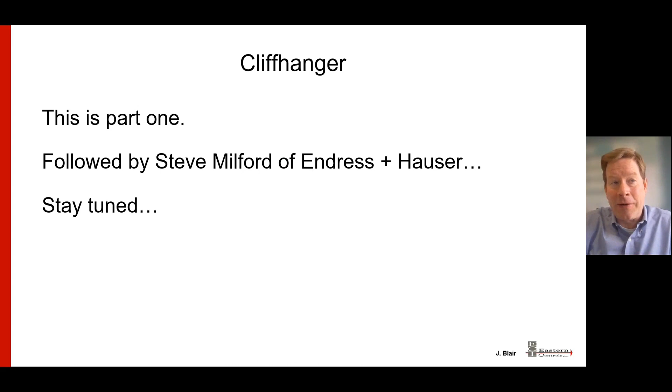So thank you for being here today. If you're a child of the 70s or 80s, maybe you remember the TV show where what's going to happen to Larry Hagman on Dallas. This is part one, a cliffhanger. I'll be followed by Steve Milford of Endress and Hauser in a later presentation.

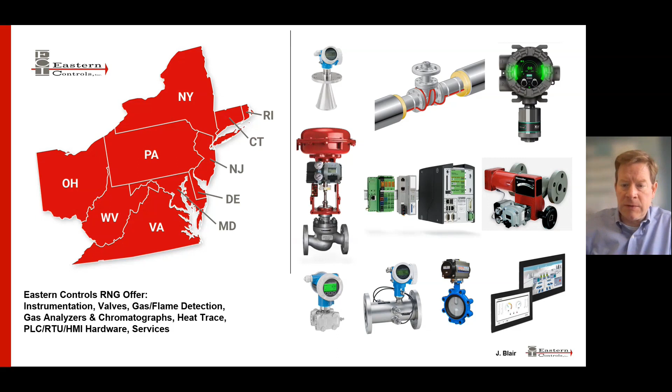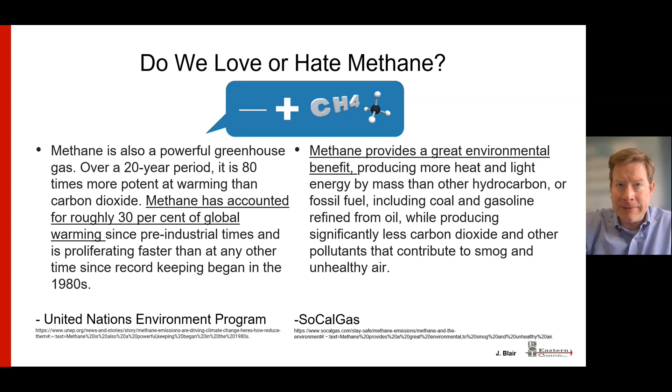So to start off, we have to think to ourselves, do we love methane or do we hate it? This presentation will feature biogas and renewable natural gas, which I'll explain the differences of in just a minute. On the left, the UN says methane has accounted for roughly 30% of global warming. On the right, we've got a utility who's used to burning coal and fuel oil, and they say methane provides a great environmental benefit. So it really depends on your perspective. Do we love or hate methane? Well, it's complicated. So today we'll talk about biogas and renewable natural gas.

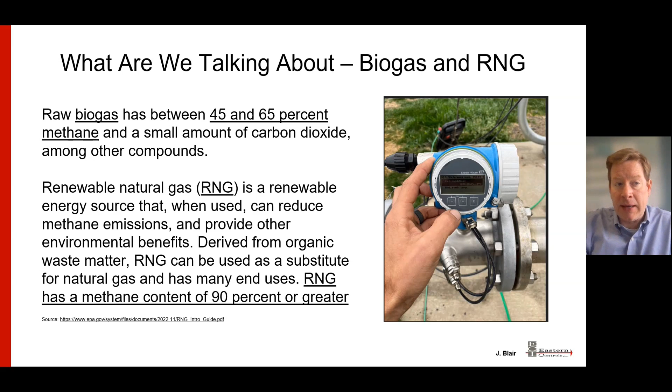To explain the difference between the two: biogas is gas that's between 45 and 65% methane. Renewable natural gas is biogas that's been upgraded to where it may have a methane content of 90% or greater. There is a difference.

So you see me here today, and thank you for having me, and thank you for attending the presentation. But you think, okay, so you sell flow meters, analyzers, and things like that. What's the big deal? It depends on your perspective, which we'll talk about in a minute.

From our perspective, we're helping to keep personnel at the plant alive with H2S and CH4 detection. We're helping to keep the bugs alive in the digester, which we'll talk about in a minute. We make sure that they're emitting the proper percentage of methane. Our analyzers ensure the quality of the natural gas that ultimately gets injected into the pipeline or may be made into bio-CNG.

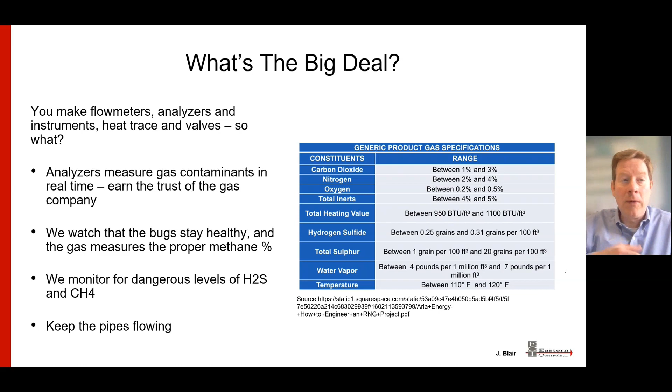And we keep the pipes flowing. If you think about heat trace and the places where some of these plants are going, they're not in the best environments. Not everything can be warm, sunny Atlanta. Sometimes these are going up in New York, in the Northern Hemisphere, and we have to put freeze protection on to keep the pipes flowing.

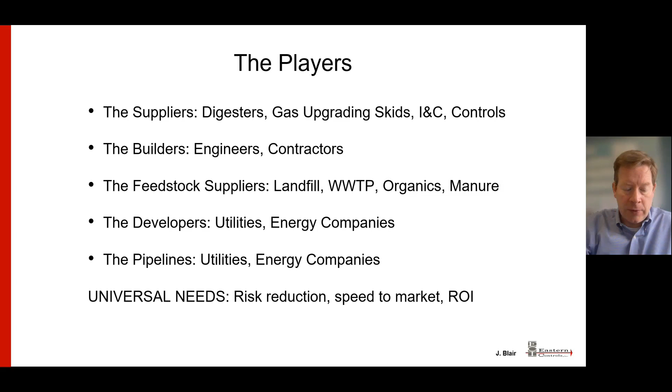So here's a look at some of the players. We'll talk about each of them and address their individual needs. But overall, the universal needs, everybody wants to see the same thing. Obviously, we're in business for return on investment and profit. But as these projects are going up quickly, everybody is involved in risk reduction as they build the plants, and speed to market, getting things built quickly.

From a vendor perspective, and I see myself as a vendor along with digester suppliers and gas upgrading skid suppliers, we want to be able to be involved in the project early. The earlier we're involved, generally, the better. That allows us to help specify equipment that may be special for the renewable natural gas and biogas market.

Besides the typical project stuff, the scope, the timeline, the project spend, the budget and things like that, we also want to know where you're going. Where will your plant be built? The reason we ask this is we want to staff ourselves up to be able to go to those remote locations to perform services.

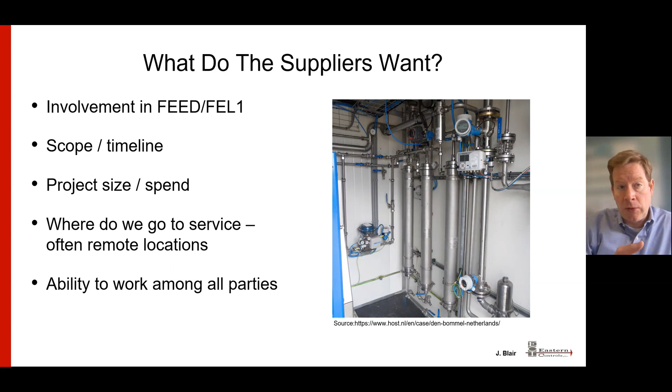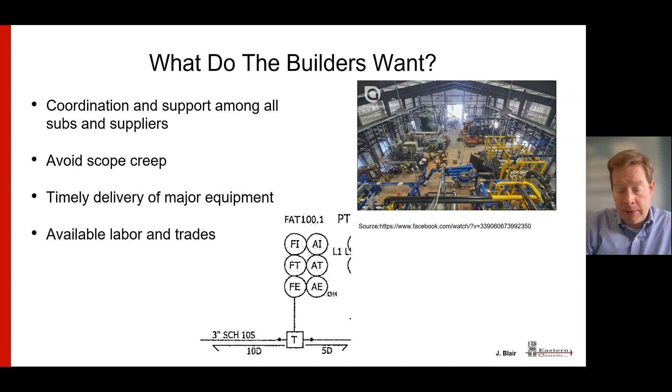Builders, they're at risk. It's tough to build these plants, certainly no easy task, so they're trying to reduce their risk wherever they can—finding the available labor and trades, making sure the equipment shows up on time, and avoiding scope creep. These builders do such a good job building the plants, and often we're trying to throw other things at them and take other things into their scope.

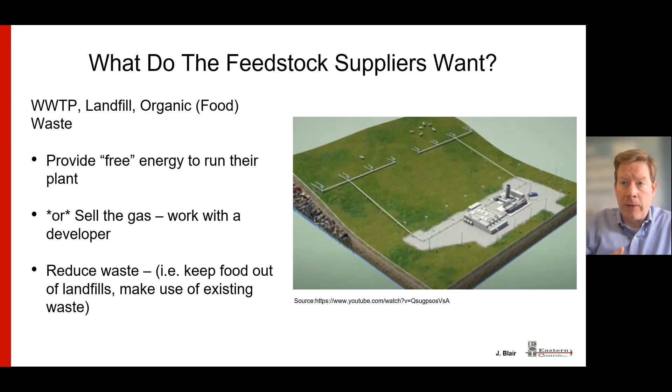We've got the parties that actually produce the biogas—your landfills, food banks, food digesters, farms, things like that. They can either keep the gas themselves and use that free biogas to run their plant, provide some electricity, maybe some hot water, or they could take the gas and sell it to a marketer or reseller who's going to go collect and help make them a profit. But at the end of the day, it does reduce waste—we're literally taking waste and turning it into energy. It's good for everybody's portfolio and business to take what's normally waste and get something out of it.

Farms are unique in this business. There's a lot of growth in renewable natural gas at dairy farms. Just like everybody else, they want to get a profit for sure. One of the popular applications before we got into renewable natural gas was just biogas, using something like a Jenbacher engine on site at the farms—we'll talk about that in a minute. They would take that gas, and 45 to 65 was often good enough for some of these engines that could run on biogas, so they could make electricity, run boilers, run heaters.

One of the unique things is the digestate—the solids left over from the actual anaerobic digester portion of the process. They use those things and can sometimes make a profit off them. They can use them internally for animal bedding, fertilizer, and crop irrigation as well.

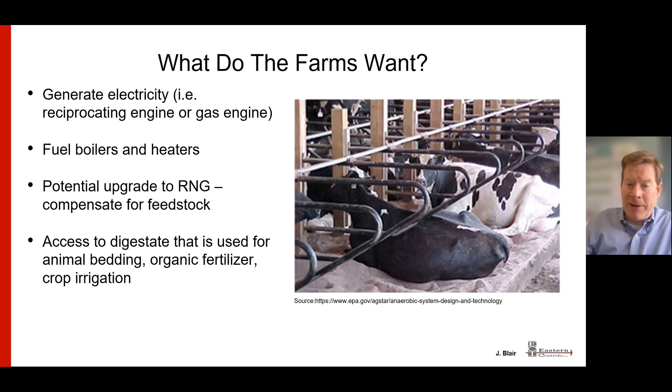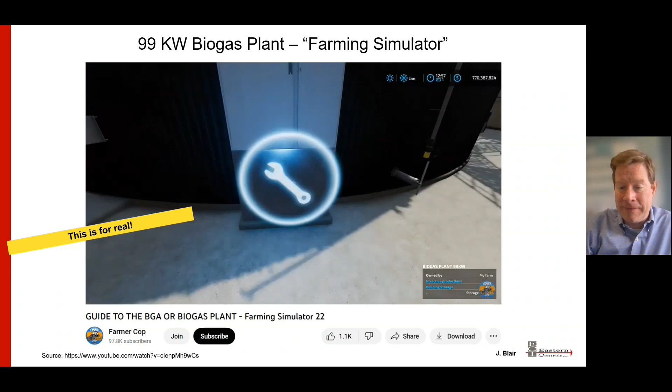So this is real—this is a video game called Farming Simulator that runs on a PC. Being an instrument guy, we look at the game and we're always looking for the instruments—where'd they put the instruments in the game? Well, I don't see any. There are certainly pumps and other portions—you've got a CHP there and a gas upgrading skid, and obviously the digesters. But this is how you know stuff has hit the big time: in Farming Simulator, you can buy a biogas plant to make electricity, and you can use all these different things for your feedstock—cut beets, slurry, manure.

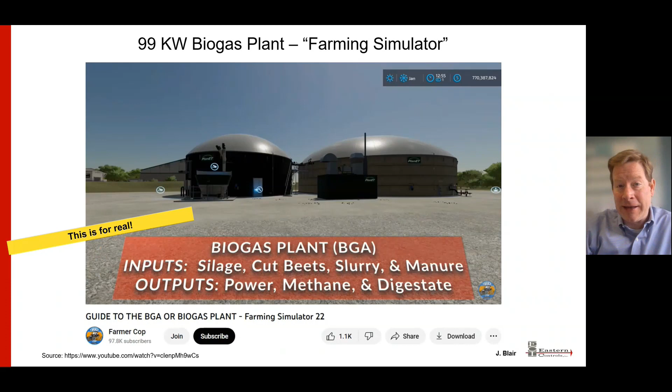Developers and utilities oftentimes are one and the same. But what are the developers doing, and what are they trying to do? It's certainly for the finance, and the finance is very good right now—there's a lot of profit to be made in renewable natural gas. Not only can they sell the gas to use in their utilities, but they can collect the RIN credits, the landfill or low carbon fuel standard credits coming from California, LCFS, and now there are tax credits when they build their plants coming from the Inflation Reduction Act that was passed last year.

It helps them green their portfolio—certainly it makes them look better. If you're a fossil fuel company, now you've got some green and some renewable in your portfolio. The gas is also much easier to access—there's typically no drilling involved like you would with conventional fracking or something like that. And it helps them meet their decarbonization goals a little quicker. The other thing is they want to ensure they're staying in compliance with how their permit allowed them to build the plant.

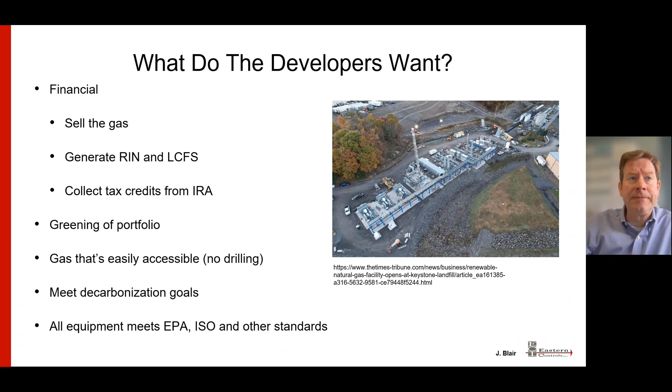And that means meeting EPA, ISO, and other standards. So this is our technician, Justin, on the right, working on a biogas analyzer.

One of the things we get as feedback from our customers, the things that help them succeed in the biogas and renewable natural gas industries, is having a single source and inventory. As these plants are being built very quickly, they often come back and want to replicate that. Things are shipped from the domestic United States in English units, and we service things on site. That's often of benefit.

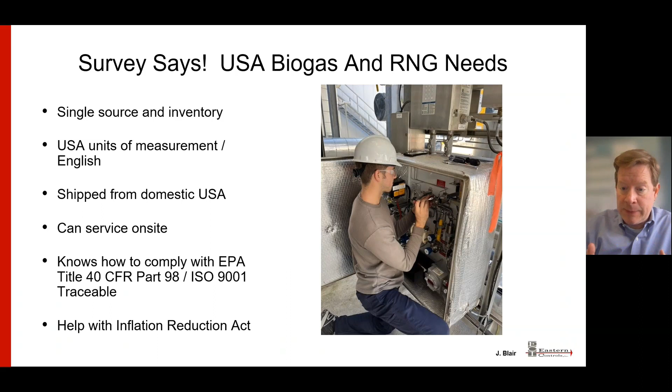And they want a vendor who knows how to comply with EPA, Title 40, CFR Part 98. Steve's going to talk about that a little bit more in just a minute, but also help with the Inflation Reduction Act. As legislation is passed, how do we interpret it and how does it benefit us?

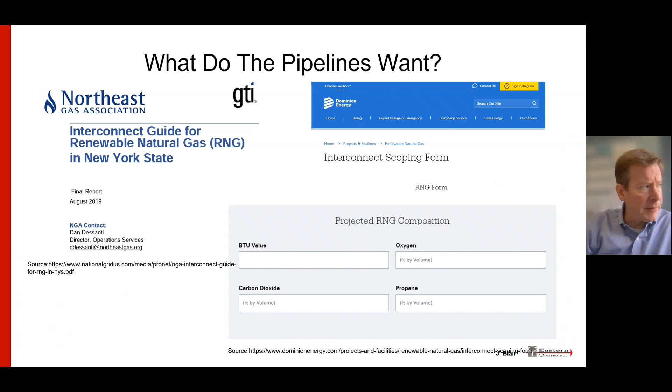Pipelines and utilities have to ensure that the gas they're getting meets their quality standards. What you see on the screen here are a couple examples of sources of gas quality from the pipeline companies.

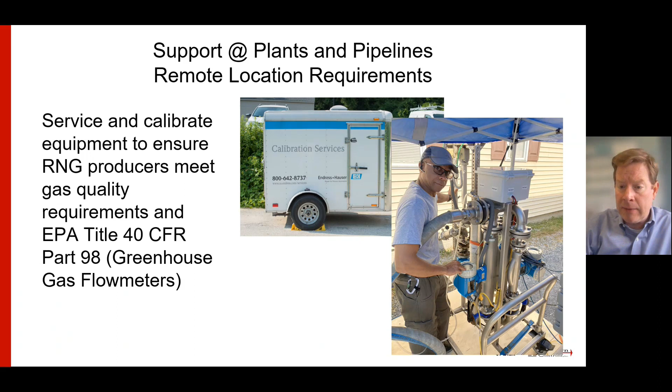When it comes to remote support, this is one of the things that a lot of these plants see and desire. You have to have the capability to go to the site and perform services. The sites are remote, often not manned by many personnel, so the ability to calibrate instrumentation and keep the customer in compliance with EPA, Title 40, CFR Part 98 is very beneficial.

And then finally, because the plants are very remote, we want to be able to look at our phones, iPads, and laptops and get an update. What's the gas quality? What's the gas flow rate? How many BTUs am I generating today? All that's available working with a control systems integrator or your vendor for instrumentation, as we can take this information, put it up in the cloud, and securely get it to you as it's happening in real time.

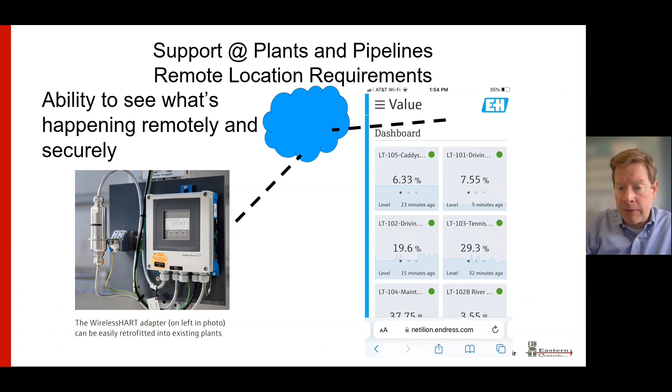What's driving growth in this industry? We're all here today talking about it. If you had to boil it down, it would be the California low carbon fuel standard, LCFS.

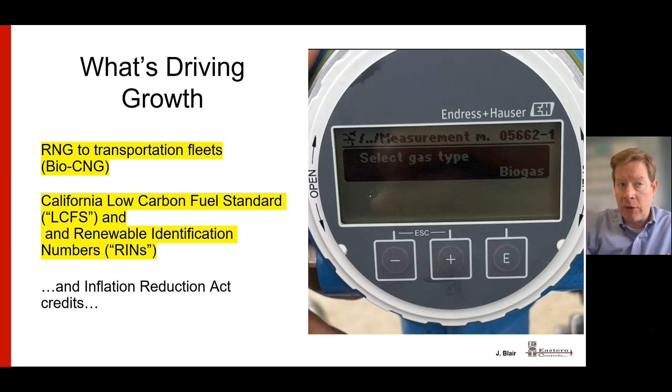The typical project: we're making something in another part of the country, or even California, putting it in a pipeline, proving it could get out to California, where California will take that RNG and produce it into bio-CNG. So there are financial incentives for that, as well as incentives for the credits from RINs and the Inflation Reduction Act, which we talked about.

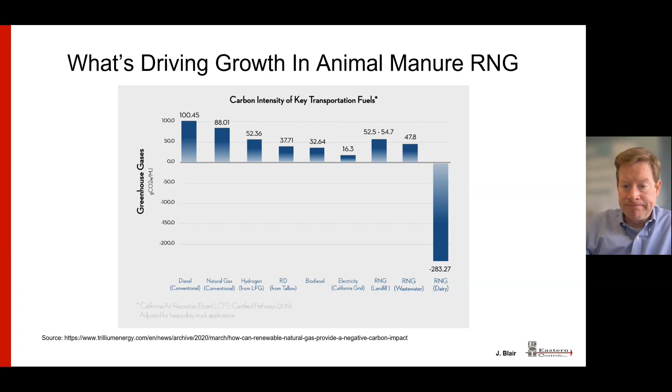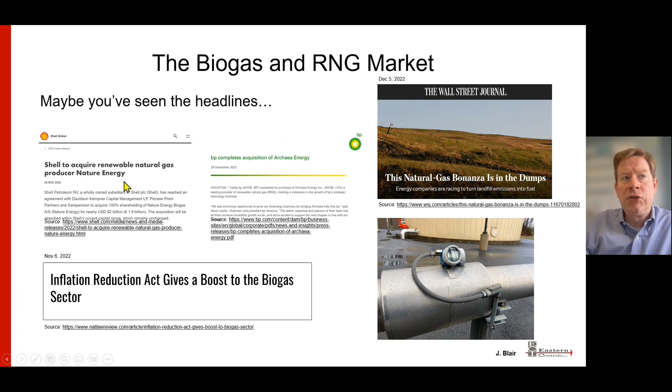The big oil and gas companies, the major oil and gas companies, are noticing renewable natural gas. They are acquiring companies, and I'm sure you've seen these in the headlines from the Wall Street Journal: BP bought Archaea, Shell is buying Nature Energy. It's really starting to catch on in the major market.

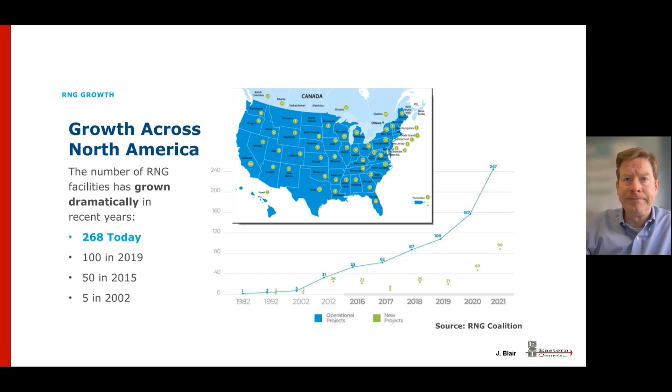Keep in mind, we talked about the four typical different types of RNG that are produced. When you take just the biogas, it comes off the digester, the bugs eat the food or waste, emit methane, and then when we take the H2S and the moisture off of that, we have biogas that we can use in an engine.

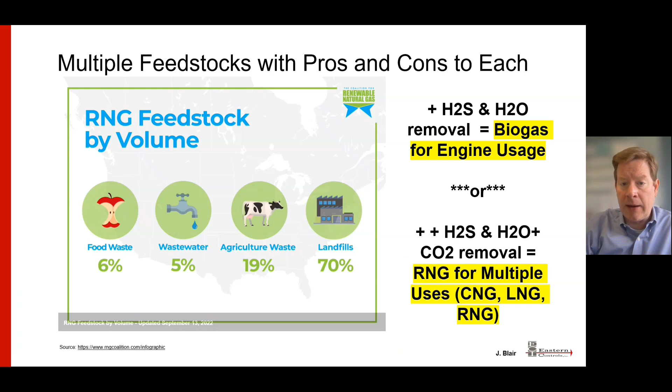If we take the moisture, the H2S, and the CO2 off of it, now we have RNG, 90% methane or higher, that we can use for transportation fuel, or just put it into the grid.

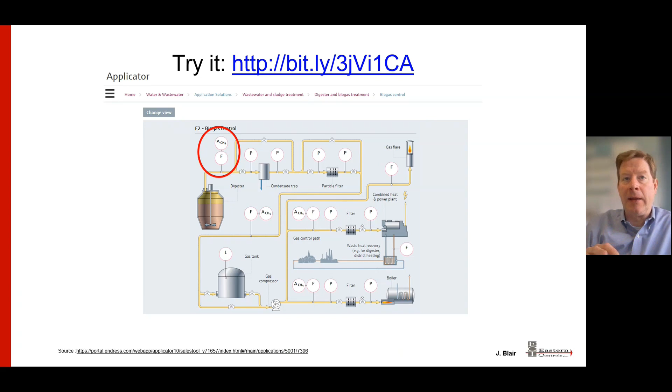If you'd like to click this link, you'll find a typical biogas plant layout with all the instrumentation within. You click on it and it will highlight the instrument and the application. Something very helpful if you're new to the biogas business.

So while we're on the subject of flow meters, what's the biogas flow meter demand? That's the title of this presentation, and Steve's going to talk about it more. What you'll typically see is when developers and builders take out their permits from the EPA, there's often a requirement such as this: the permittee shall calibrate, maintain, and operate a biogas flow meter that shall be placed at the outlet of the covered anaerobic digesters, et cetera.

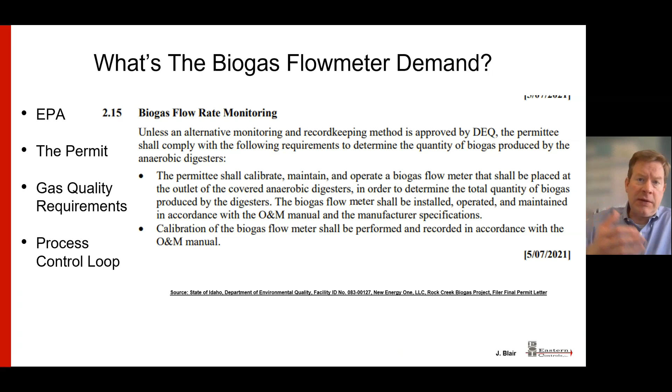Popular place to put one, by the way. It helps monitor the quality and health of the bugs. You'll see this often throughout, sometimes buried in the permit or the EPA language. And again, the EPA always wants to ensure that we're complying with their requirements of greenhouse gas monitoring or reporting.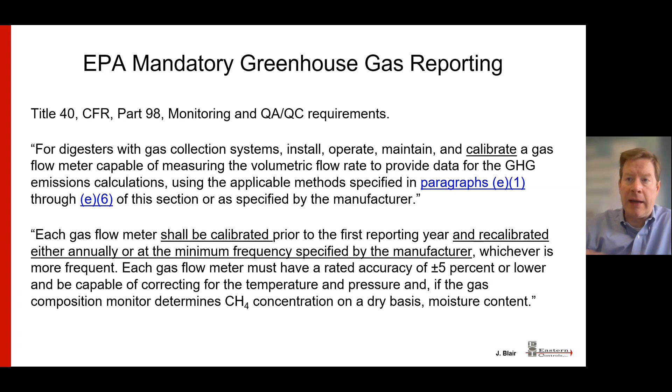They have certain restrictions regarding the calibration and recalibration of the meters. This is what a calibration looks like. We have a remote rig that we take to site, and we also have a calibration rig at our facility in Philadelphia. But what we can do is take that to a remote site so the meter doesn't have to travel.

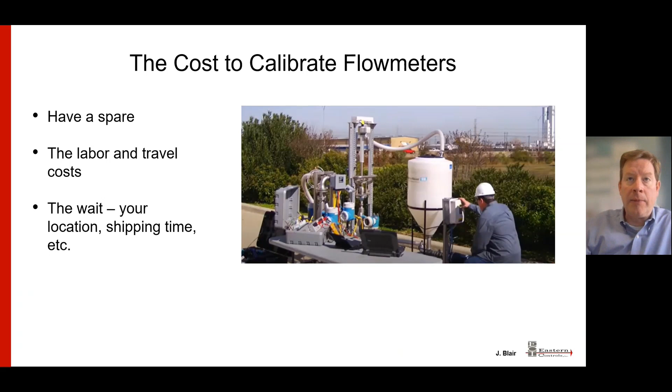But still, the meter has to be pulled out of the process. You have to have a spare if you want to keep running, or you have to wait for the meter to be calibrated. One of the options we'll discuss a little bit later with Steve is maybe you don't have to calibrate and can still stay within the EPA requirement. Verification is one way to do that.

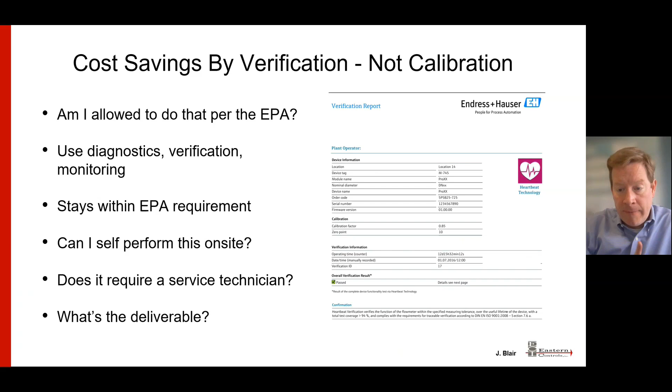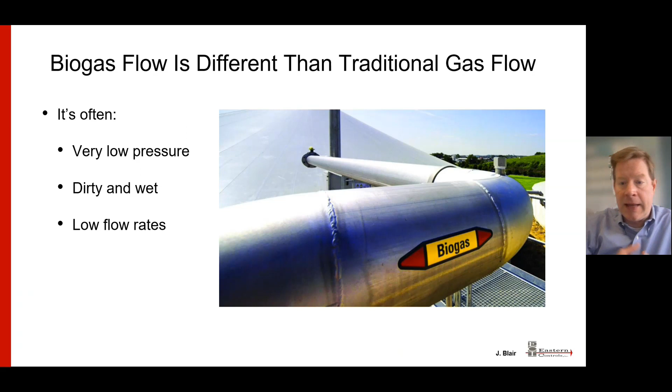Keep in mind, when you're monitoring biogas flow, it's different than traditional flow. There's lots of people from lots of industries that got into the biogas business, but biogas is often very low pressure, so we can't use our favorite differential pressure flow meter. It's dirty and wet, and the composition may change, which often rules out a thermal mass flow meter or a turbine flow meter. And the rates are generally too low to use a vortex flow meter. It's low pressure, wet and dirty, and it comes at a very low flow rate.

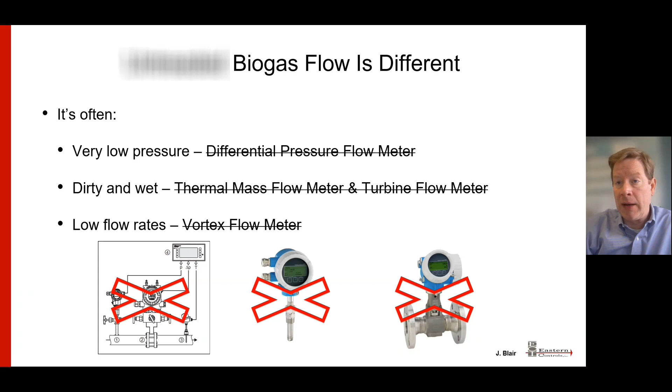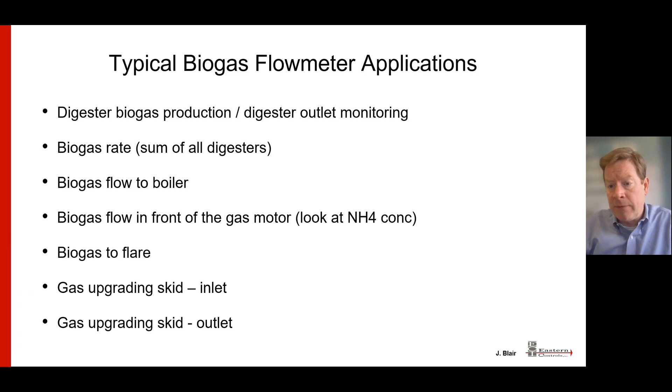So there's a specialty market for biogas flow meters, and where they're typically seen, like you saw in the permit, they're often used coming out of the digester into the gas upgrading skid, outlet of the gas upgrading skid, and into the flare. There are several other applications, but those are typical for a dairy plant.

So back to what we talked about earlier, we're very proud of what we do. The analyzers we manufacture and service help ensure the quality of the gas that comes out of the plants, goes into the pipelines, and is used for transportation fuel or in our homes. We monitor the health of the personnel, we monitor the health of the bugs, and we keep the pipes flowing.

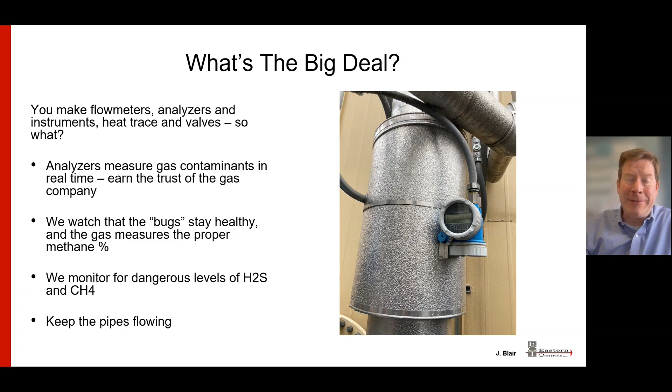So just to recap, we talked about the market, our mutual needs, and the growth of the entire market, where we're seeing growth in landfill, water, wastewater, food, and especially growth in dairy renewable natural gas. We talked about some of the demands placed on plants by the EPA in terms of services, issues with some current measurement techniques, and some things we can't use that maybe we've used on other projects, as well as the solution to our needs.